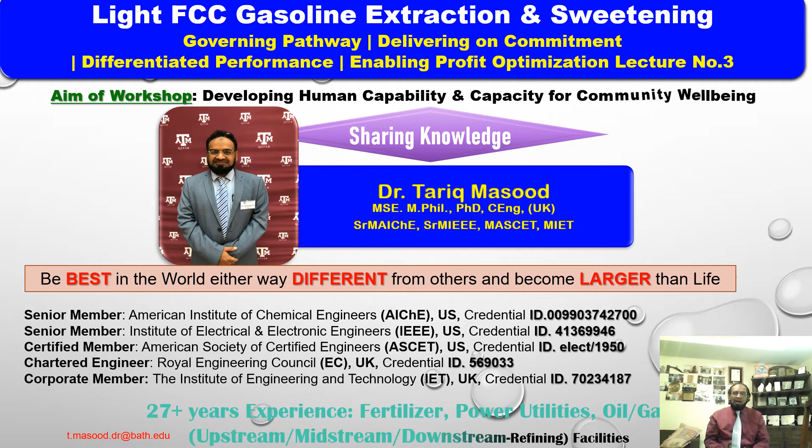Okay, today I'm going to discuss my lecture number 3, Light FCC Gasoline Extractions and Sweetening Unit, Fluidized Catalytic Cracking, Governing a Pathway, Delivering on Commitment, Differentiated Performance, Enabling Profit Optimization, Process lecture number 3.

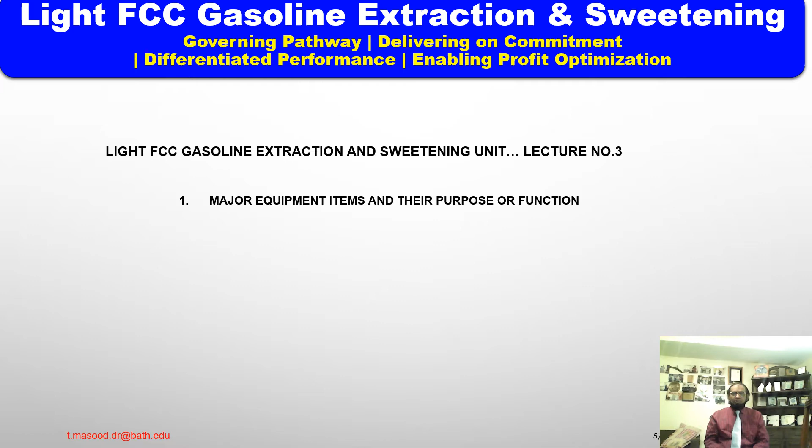Light FCC Gasoline Extraction and Sweetening Unit, lecture number 3, Major Equipment Items and their Purpose and Functions. Key takeaway points from lecture number 3, FCC Gasoline Extraction and Sweetening Unit.

Now today we are going to discuss first extractor, reactor, oxidizers, wash naphtha settler, Disulfide Separator, vent tank, Disulfide sand filter, Minalk Caustic injection nozzle, air mixer, special check valves.

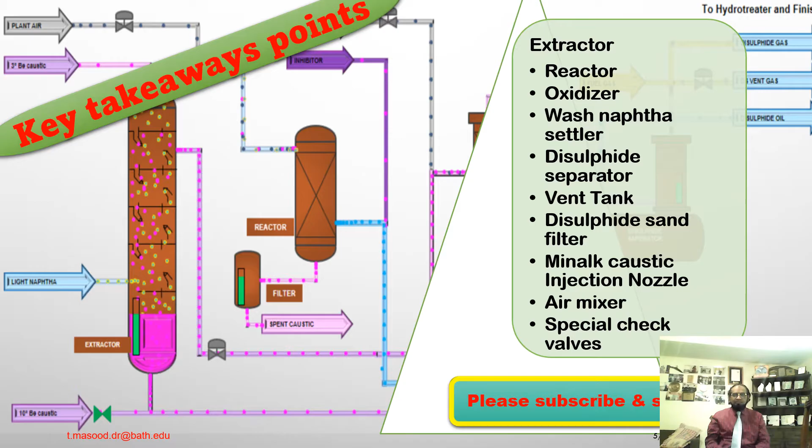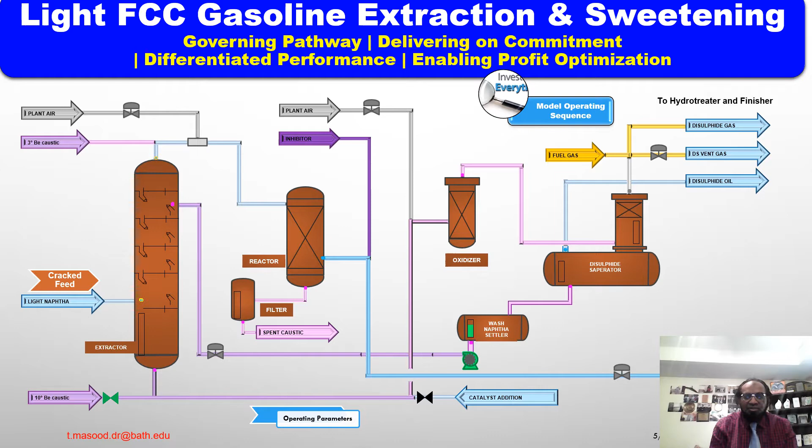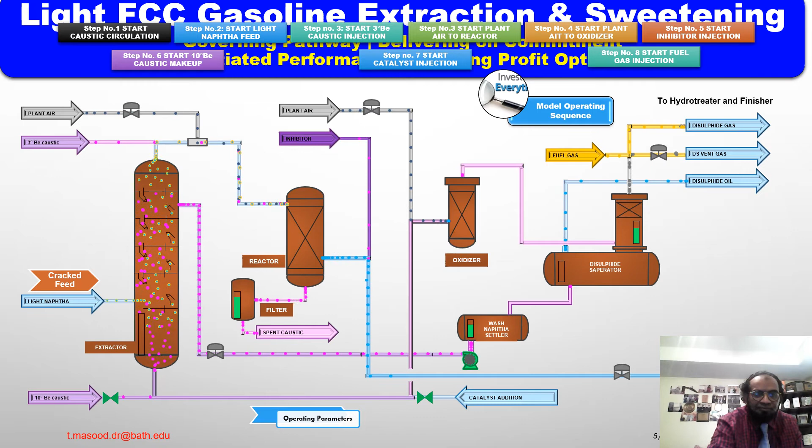Key takeaway points number 1, extractor unit. The extractor is vertical vessels consisting of 8 trays depending on the feed, specially designed or perforated trays.

Each tray consists of a caustic inlet reservoir with the inlet weir, which separates this reservoir from the central mixing region. The central section is the mixing region of each tray and contains perforations to allow the upflowing gasoline to contact the cross-flowing caustic. The caustic mixing with the gasoline disengages as it is carried upward and overflows the outlet weirs.

Collecting in the caustic outlet reservoir, a downcomer pipe transfers the caustic to the next tray inlet reservoir by gravity flow. Since the caustic flow rate is low relative to the gasoline flow, it is very important that both inlet and outlet weirs are leveled.

Also, no caustic leakage can be tolerated at any point in the tray. The tray should be entirely sealed except for man-ways, which are sealed with neoprene or rubber gaskets. The inlet and outlet reservoirs should be leak tested and contain no leaks. Even the tiniest leaks will serve to reduce the extraction's efficiency and capacity by upsetting the carefully designed hydraulics.

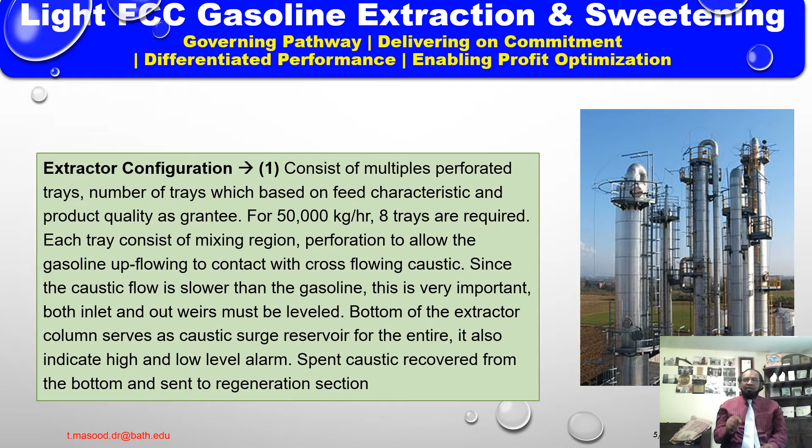Next is the reactor. Reactor configuration: the fixed bed reactor is a vertical vessel designed to contain the charcoal bed upon which Merox catalyst is impregnated.

The holes in the inlet distributor should be protected from plugging during charcoal loading by wrapping the distributor with canvas or plastic covering. The outlet collector and the vessel strainer pipes are specially constructed stainless steel slotted screens of a proprietary design manufactured by Johnson Screens. The screen slot width is 0.25 millimeters or 0.01 inch.

The drain port, a balancing line screen, is normally a much smaller version of the same type of screen. These slots should be closely inspected before commissioning to ensure that any damage serving to open these slots is repaired.

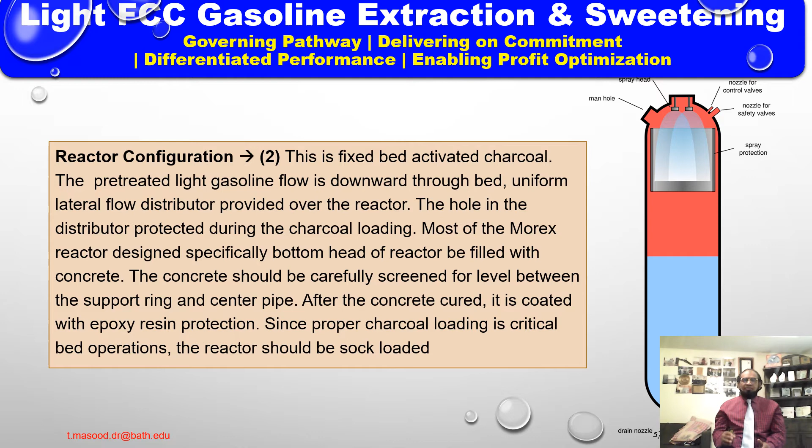The most recent Merox reactor designs specify that the bottom head of the reactor be filled with concrete. The concrete should be carefully screeded for level up between the supporting ring.

Oxidizer. The oxidizer is a vertical vessel designed as a mixer to contact rich caustic from the bottom of the extractor, containing a Merox catalyst and sodium mercaptides, with air for regeneration. Since this vessel contains mixed vapors, liquid phase packing is provided in the form of 40 millimeter diameter carbon raschig rings. Carbon composition is used because it is inert to the strong caustic and severe oxidizing environment encountered.

Because these rings are subject to breakage, the loading should be done with the vessel filled with water. Caution is advised that the vessel should be completely full of rings, flush with the top manway, otherwise ring attrition will occur as a result of the abrasive contact caused by the subsequent shifting action.

An inlet distributor is provided consisting of a perforated pipe enclosed by a slotted sleeve. The slots in the sleeve point downward while the holes in the pipe are oriented upward. This arrangement is designed to provide maximum mixing.

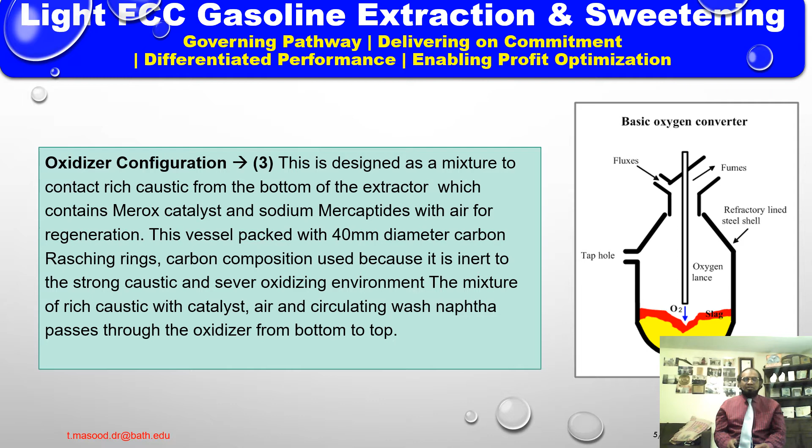Wash naphtha settler tank. The wash naphtha settler is a horizontal vessel designed to promote gravity separation of aqueous caustic solution from the wash naphtha. An inlet distributor is provided to avoid excess inlet turbulence and promote even flow distribution through the vessel. It consists of a single pipe arranged vertically through nearly the full width of the vessel's diameter, with one full-length slot facing the nearest head of the vessel.

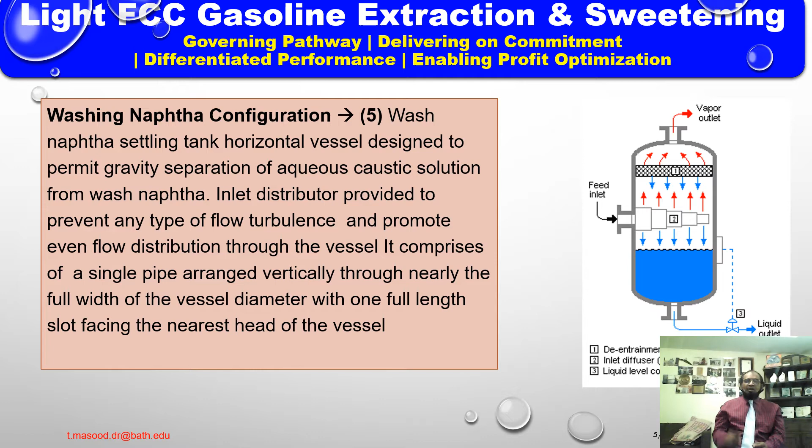Regenerated caustic solution with wash naphtha is sent to the wash naphtha settler tank by the caustic circulation pump. The regenerated caustic is returned from the bottom of the wash naphtha settler to the extractor unit. Wash naphtha exiting at the top of the settler is split into two streams: one circulates back to the suction side of the caustic circulation pump, while the other is routed through level control to the oxidizer.

Disulfide separator. The disulfide separator is a horizontal settler vessel with a small air disengaging stack at the end. The inlet distributor enters at the midpoint of the stack. It is slotted at top and bottom to aid both disengaging and distribution. The excess air flows upward into the packed area.

The packing consists of 25 millimeter, 1-inch diameter carbon steel raschig rings. These rings are susceptible to corrosion, especially during periods of sustained operation at high oxygen content in the vent gas. These rings should be inspected regularly since they provide a secondary safety function as flame arresting as well as acting as a demister.

The liquid passes downward into the main vessel, or horizontal section, of the separator. It encounters a second packed zone that is 1200 millimeters, or 4 feet, in length. This zone is packed with 4x8 mesh anthracite coal, which acts as a coalescer to aid in the separation of the disulfide oil from the regenerated caustic.

The coal retaining screens are 9x9 mesh with 1.6 millimeter, 0.063 inch diameter wire, supported by standard deck type grating. It is important that the annular space between these screens and the vessel wall, along with any space between screen sections, be carefully sealed, otherwise coal leakage may result.

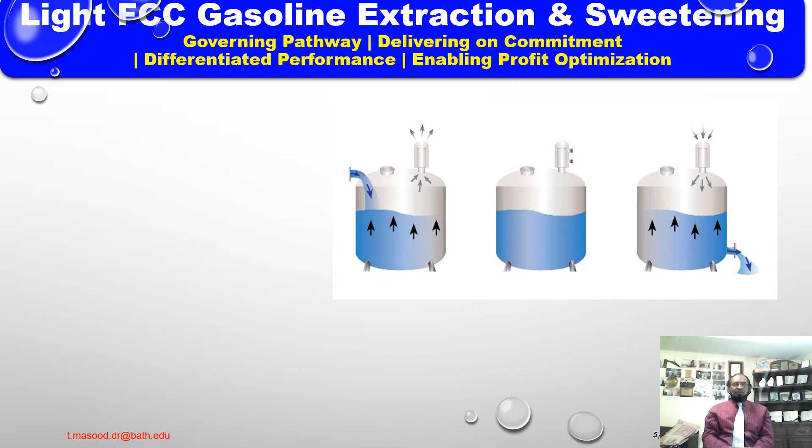Vent tank. This small vertical atmospheric vent tank is provided to separate any liquid carryover from the vent gas exiting the disulfide separator during startup or periods of unsteady operation.

The packed zone is provided to coalesce any liquid and provide a safety function as a flame arrestor. The packing consists of 25 mm, 1-inch diameter carbon steel rings, which are subject to the same loading and maintenance as detailed for the disulfide separator stack.

The bottom drain is open to atmosphere but sealed by means of a hydraulic overflow seal. Thus, for startup, the vent pot must initially be filled with water in order to provide a seal.

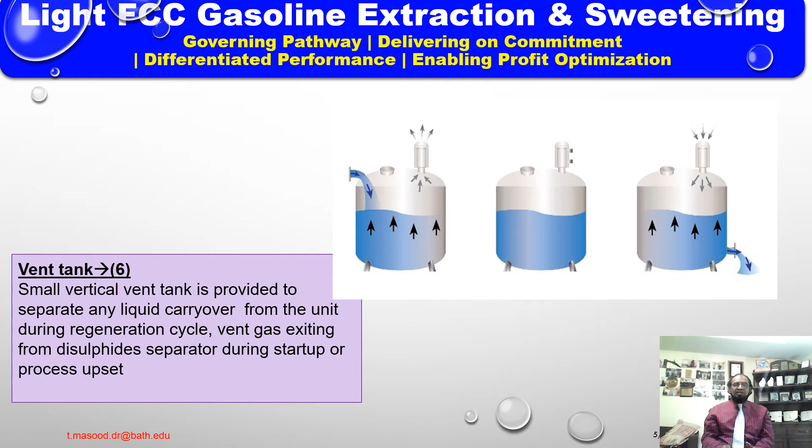My next topic is the disulfide sand filter. When the disulfide oil goes to any downstream processing such as an FCC unit, a sand filter is usually provided

to coalesce any entrained caustic or wash naphtha solution. A sand filter may be desirable even if the product simply goes to storage.

The sand bed of the disulfide sand filter consists of a specified depth of 8 to 16 mesh quartz or silica sand. The sand bed is supported on a special Johnson screen, proprietary design, a steel grate with 0.6 mm or 0.025 inch openings.

Disulfide oil enters at the top of the vessel through a slotted distributor, passes downward through the sand bed and through the support grate, and makes a turn before exiting from the side of the vessel.

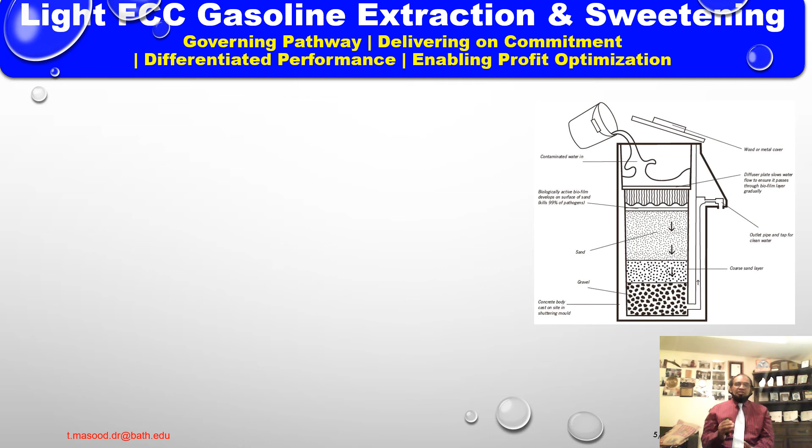Okay, caustic injection nozzles. The type of nozzle used for caustic injection in the Merox unit is a specially designed caustic atomizing nozzle.

It is used to disperse the low caustic flow rates required for the Merox versions of the fixed bed sweetening process. It is inserted in a pipe elbow so that the caustic spray is directed in the same direction as the gasoline flow. The nozzle inlet is stainless steel with a very tiny restriction orifice.

Often it also contains a helical-shaped rotating internal element. The function of these parts is to create a full cone spray pattern. Thus, the liquid clearances are of necessity very small, and the nozzle will plug up easily.

For this reason, it is important that the caustic injection pipe be flushed extensively before startup to remove all dirt. Since plugging is likely, the nozzle is removable without shutting down the gasoline flow. A pipe-in-pipe system is used.

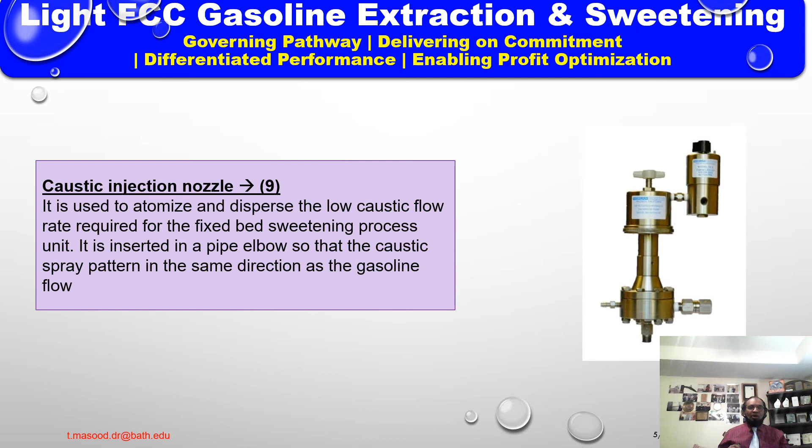A packing gland is provided to seal the annular space between the inner and outer pipes. To remove the inner pipe and nozzle, loosen the packing slightly, allow the inner pipe to slip back until the inner nozzle clears the shut-off valve, allowing complete removal of the inner pipe and nozzle for cleaning.

Okay, air mixer. This is a specific piece of equipment common to all fixed bed sweetening units. It consists of a central mixing chamber in which gasoline and air meet from opposite directions. The common exit for gasoline containing dissolved air is perpendicular to the inlet.

A slotted stainless steel filter cylinder is provided to disperse the air. If the air lines contain any dirt, this filter will become plugged.

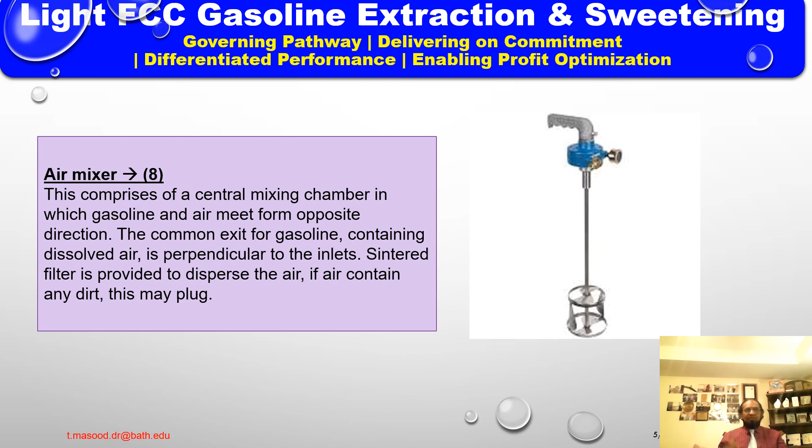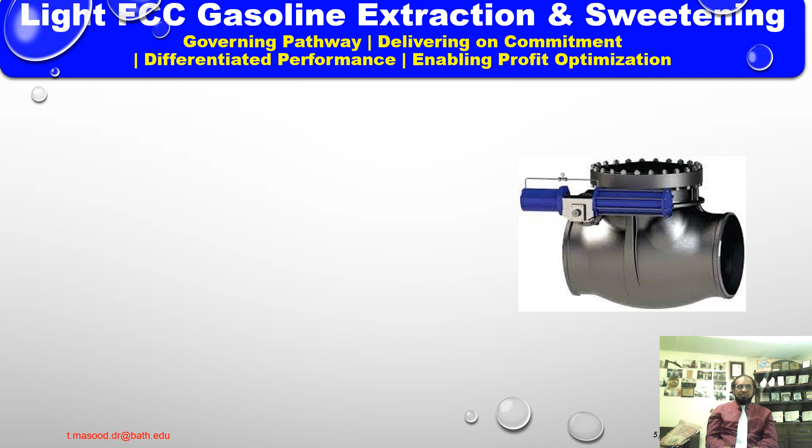Conclusion. What we discussed today: extractor, reactor, oxidizer, naphtha settler, separator, sand filter.

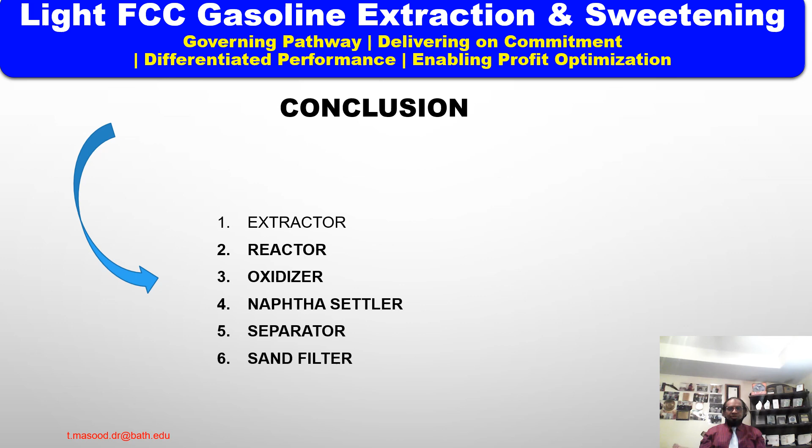My next topic will be preparation for initial startup of the light FCC gasoline extraction and sweetening unit.